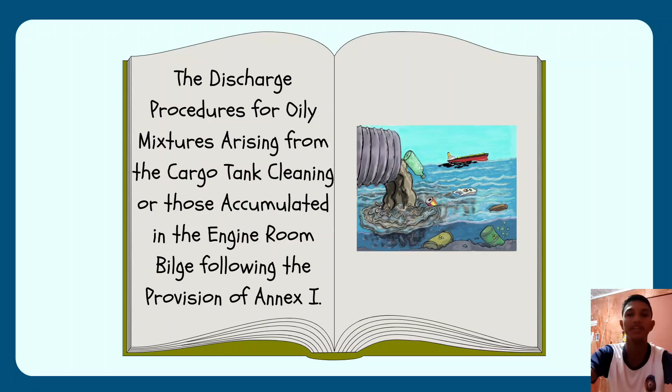Today I'm going to explain briefly the discharge procedure for oily mixtures arising from the cargo tank cleaning or those accumulated in the engine room bilges following the provision of Annex 1. First, engine room bilges. Machinery spaces.

The engine room naturally accumulates oily water in its bilges from regular machine operation. There is what we call a tracking tool. Every time the ship deals with engine room oil waste, it must be logged immediately in the oil record book, ORB Part 1. Immediately means right after the operation finishes.

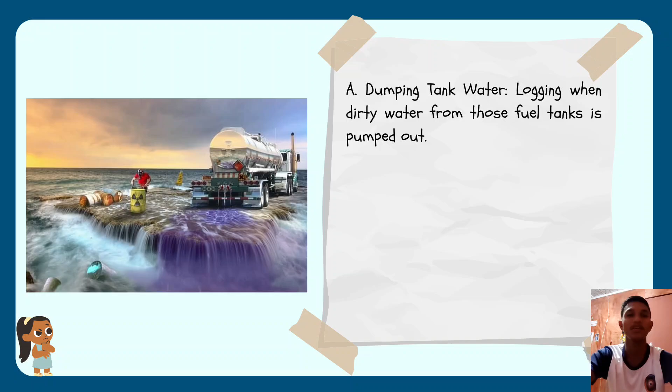So write the date, time, place, and how much oil was handled right after you finish the job. Then what must be recorded in the ORB? A. Dumping tank water. Logging when dirty water from those fuel tanks is pumped out. B. Cleaning oil waste. I-record during pag-collect and pagkuha sa thick oil mud, or what we call sludge.

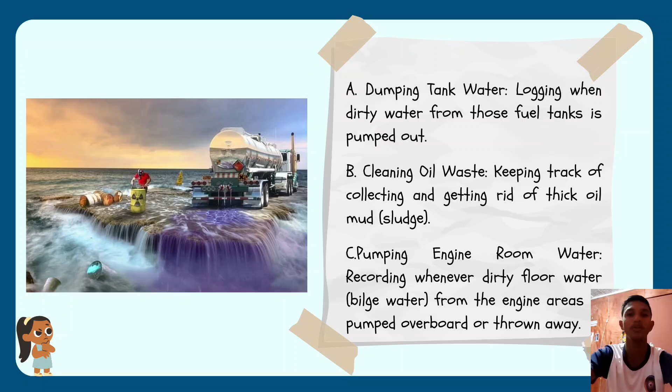C. Pumping engine room water. I-record na sad whenever dirty floor water, or what we call bilge water, from the engine areas is pumped overboard, or kanang ilabog. D. Taking on new oil. So record whenever the ship loads new fuel or large amounts of lubricating oil, or maoni gitawag nga bunkering.

And please note that this logbook must stay on board and be easily available for inspection for at least 3 years after the last entry. Second is cargo tank cleaning. Cargo area of oil tankers. Cleaning out tankers' massive cargo tanks creates a large amount of highly concentrated oily water. MARPOL strictly regulates how and when this can be discharged.

So naa'y importanteng pamalakad or procedure sa pag-discharge sa oil. First, let's talk about discharge outside special areas. To legally pump cargo-related oily mixtures into the sea outside of restricted zones, all of these 6 conditions must be met. Means naa'y mga lugar na prohibited, which is dapat careful jud. So the tanker cannot be inside a designated special area, for safety and para pod dili ma-ban ang inyong barko. Second, the tanker must be more than 50 nautical miles away from the nearest land.

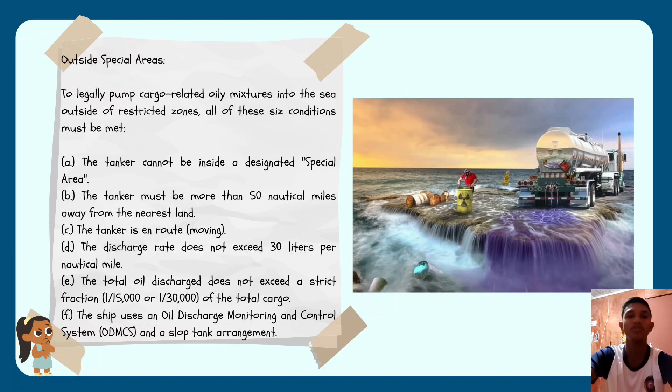Lastly, the ship must have a fully operational oil discharge monitoring and control system, ODMCS, and a proper slop tank arrangement. And next is discharge inside special areas. There is a rule in this. Any discharge of oil or oily mixtures from the cargo area is completely prohibited while the ship is inside a special area. Note that clean or segregated ballast is exempt from these strict discharge restrictions.

Then the third important thing to consider is systems and equipment used. The ODMCS or oil discharge monitoring and control system: oil tankers of 150 gross tonnage and above must use this automated system. It records exactly how much oil is being pumped out per mile, the total quantity, and the date and time. So dili lang diay basta-basta magawas og mga oil or waste. If the oil content exceeds what is legally allowed, the system automatically stops the discharge. So naay machine mo-track ana, which is what we call ODMCS or oil discharge monitoring and control system.

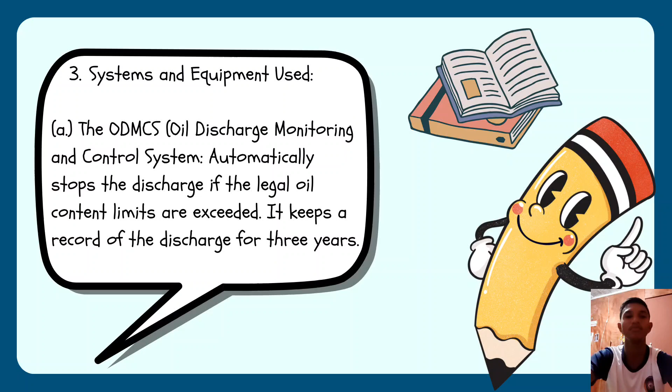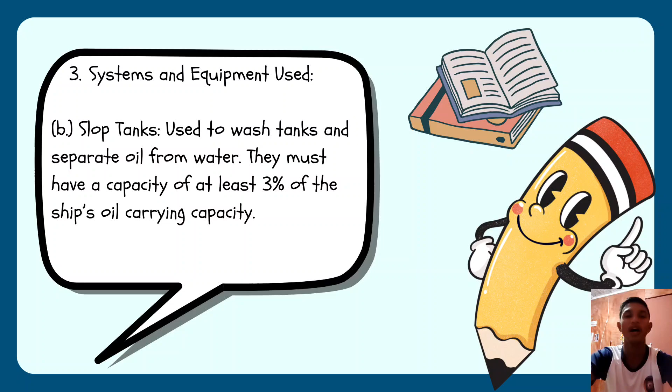Next is slop tanks. Tankers need a way to separate oil from water before pumping anything out. They must have a slop tank arrangement designed to hold the tank washings, oil residues, and dirty ballast. The total capacity of the slop tanks must be at least 3% of the ship's total oil carrying capacity. Large tankers of 70,000 tons deadweight and above delivered after December 31, 1979 must have at least two slop tanks.

And the last thing to consider is the cargo logging tool. Just like the engine room, every single cargo operation must be meticulously logged in the oil record book Part 2 by the officers in charge and signed off by the master. This includes everything from loading and unloading oil, transferring cargo during the voyage, operating the slop tanks, crude oil washing, to the final disposal of any residues. Like Part 1, it must be kept safe on board for 3 years.